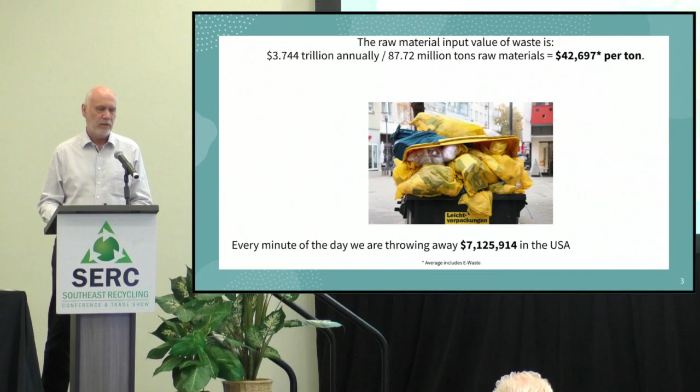What we're doing right now, you've seen this a number of times today, we have the linear economy. You take it out of the ground, you get raw materials, you refine it, you manufacture something out of it, you use it, and throw it away, very often landing in a landfill.

There have been some very interesting ways shown today of what you can do otherwise with some waste, like clothing recycling. That is very important to do, but a lot still lands in a landfill. We're throwing the resource waste away. End of the economic chain, a lot of value gone.

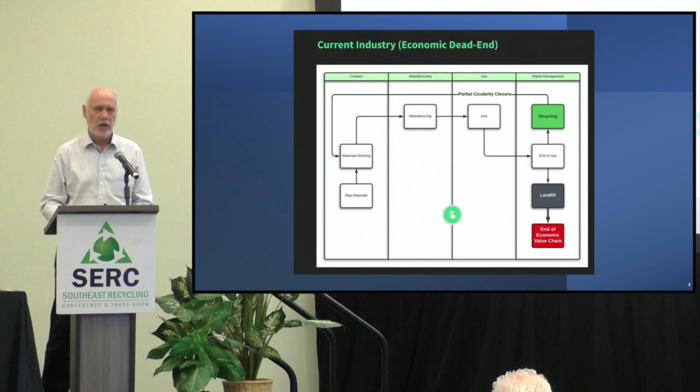What we'd like to do is break this end chain and bring it, after the end of use, into the Carbotura Regenesis process, where we're closing the circularity loop and bringing it back as raw materials into manufacturing. So it is recycling to 100%.

So your municipalities and cities can now say, we're not making the 25 or 30% that we normally hear, or 40% in some other places, which is marginal, but we can get it to 100% recycling.

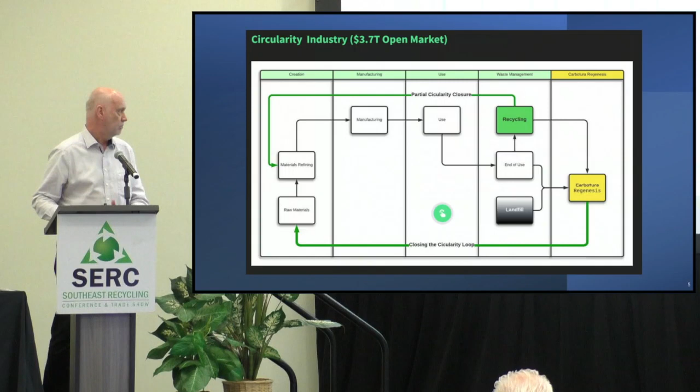What we do, we have the Carbotura ZeroFill service. We've introduced it into the global waste industry. It is a proven and patented technology, about 40+ patents that we have access to, and it closes this broken loop and brings 100% circularity into the circular supply chain.

It is not waste management, I'm not talking about the company WM, it's not a waste management or recycling industry. We are really from the manufacturing of materials industry. It's a different view of this. We are in the circularity industry. We supercharge waste management with circularity. It's a little bit different. We'll go into that shortly.

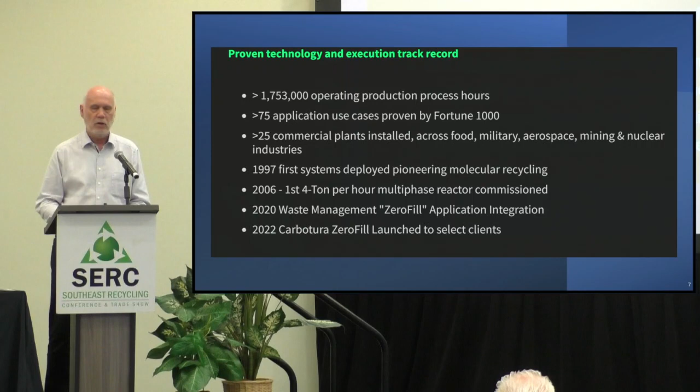With this technology that we use in the Carbotura process, we have 1.753 million production operating hours, many different applications in Fortune 1000 companies, 25 commercial plants installed across the food, military, aerospace, mining, and nuclear industries, proving this technology. And the Carbotura ZeroFill service is launched to selected clients starting in 2022.

We are doing front-end engineering for a 2,000 ton per day MSW, Municipal Solid Waste, facility in Chennai, India, one of five. So in Chennai, India, they're scaling up to 10,000 tons of processing waste per day, 7 days a week, 24 hours a day, 365, no stop. This can work. That's a hell of a lot of waste.

Under development, we have a 500 ton per day MSW, MLW, municipal liquid waste, demo facility. It will be in Colorado, where we are also setting up a production facility on contract manufacturing to produce these units. And also another facility in Connecticut for MSW, MLW, tires, ash, and other things. We can take that in there.

And there are 50 projects totaling 142,000 tons per day of capacity in various stages of service and development. Some are in Saskatchewan, Canada, Jefferson County, Alabama, Miami-Dade, Florida, around 6,000 tons a day. And that should be coming.

In Miami-Dade, we will even be able to process the sargassum, the seaweed that's coming across the Atlantic and inundating the beaches that our people want to go swimming at. The sargassum is quite smelly, quite toxic actually, when it gets on the beaches. And they're not allowed to bring it into the back swamp somewhere and just dump it. Rather, they have to process it in a certain way. And there's no good way to do it other than with the Carbotura process.

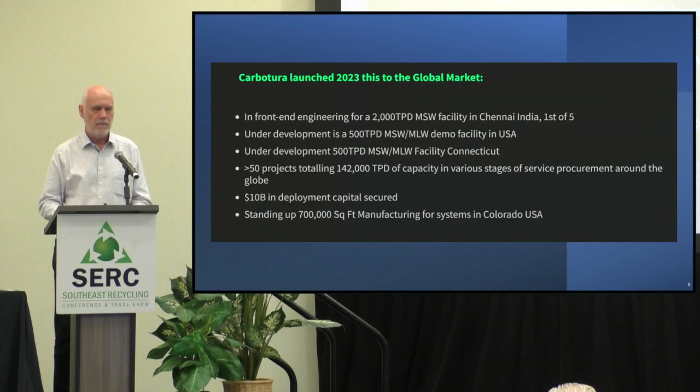100%. So what does it cost? Zero. We also set up a circularity fund for the community from our own profits that we will bring back to the community, to the citizens of such a community, to help them with an environmental fund, an environmental group there that wants to do something for their community. So it's not only carbon negative, this whole process, but it brings back money to the community, costing it zero. That zero is less than a $10 landfill fee, at least with my math.

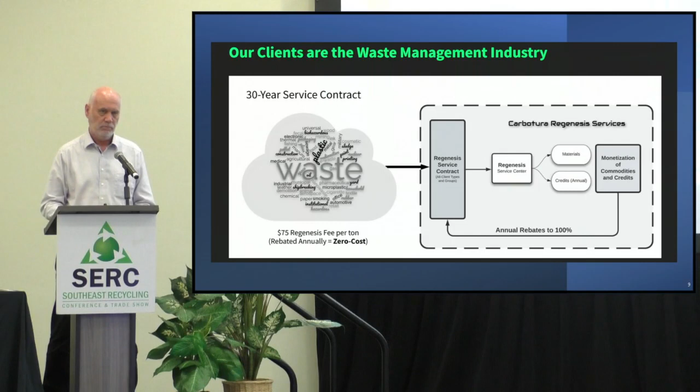We create materials out of it, which we can bring back into the circular economy and create new materials, hence regenesis. Sounds a little bit spooky, those words, but it's regenerating or allowing you to make new materials out of the waste that has come there without having to sort. There's no pre-sorting done at all. We want a 30-year partnership to modernize the waste infrastructure that you have.

What could that mean? Right now you will have at home how many different bins? You'll have the waste bin, the recycling bin, a paper bin, an organics bin, something else. Maybe someone else can chime in and tell me what you have, but you have all those. We can take it all in one bin at home. That means good things for each citizen, each household. One bin, maybe 2 bins for your waste, all your waste, organics, all your old recycling.

Now you don't have to take your yogurt thing, wash it out at home, and put it in there because you don't want the MRF to take that yogurt anymore. Okay? You don't need to do that. Put it all into one bin, we can take it away. It also reduces the amount of trucks on the road.

Now, one of SWANA's goals is to get the waste industry off the 10 most dangerous jobs in the US, where it is right now. I think it's number 7. Correct me if I'm wrong. 5? That's gone up to 5 again. That's not good. That's not good. We've got to get it off. So if you reduce the number of trucks out on the road, then you have a safer workplace.

Fewer people getting hit. I just saw the other day a video the former head of SWANA, David Biederman, was sending out, I think on Facebook or something like that. It showed, on the back of a truck, the little video camera looking down where the guys are dumping the cans and the bins into the truck. And he looks back and he sees a car barreling toward him. He jumps out of the way and the car goes right into the back underneath the truck, all the way up to the front window.

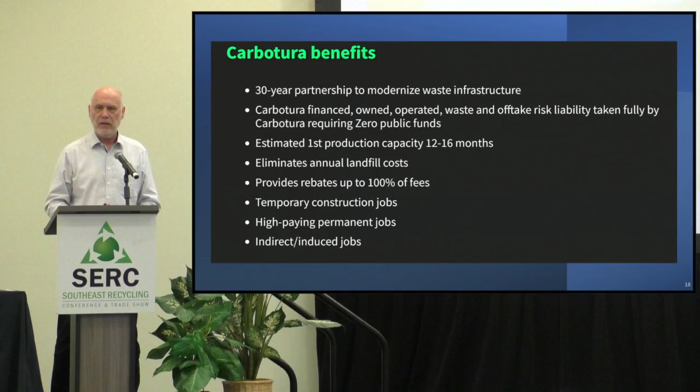But consider the extension of your landfill life. Instead of only 10 years left, now maybe you have 30 or 40 or 50 years left on that landfill, because you're putting such a small amount in weight and volume on it now. Cleaner air and water, reduced pollution, no odors, no stink. This is all under negative pressure in the buildings. There are no emissions coming off the Carbotura process.

We reuse and remediate existing locations. As I said before, we can mine a landfill and process this material as it is. Improve public health and environment: no emissions, nothing going into the ground, nothing going into the water system. We can take all of that and sell all the product coming off. It's 100% diversion from landfill and 100% recycling. That might bother some of the MRFs out there, because they don't get this material anymore. Okay? Maybe we can take over these people and have them work in such a Carbotura facility as well.

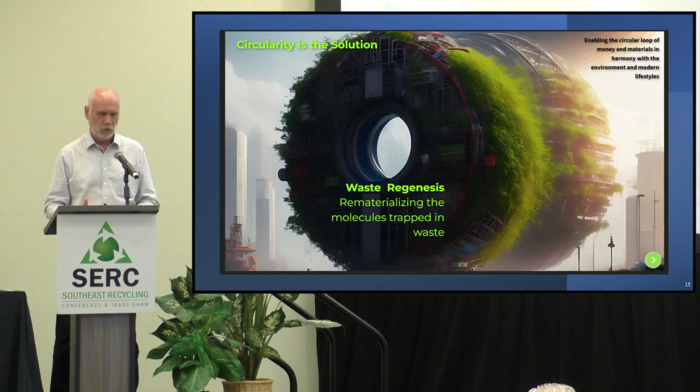You get the 100% diversion, recycle 100% of all the waste. You do it with zero capital, our investment. You can have it with zero emissions, and you can achieve zero cost with it. And there's no single-use waste materials. Now, you've been told before straws or these bottles may be just single use and you throw them away. Well, there is a reuse for these.

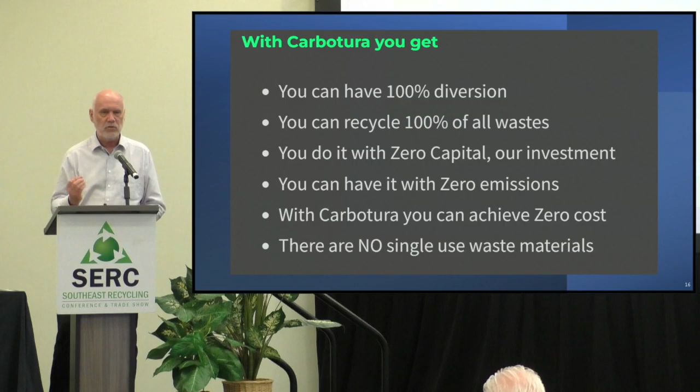You can break those down and you get the molecules out and reuse those molecules to make new plastics, new virgin plastics out of it. You're not just stuck with a PE molecule there and a PP and whatever they are out there and finding those and sorting those. You get the individual atoms out there.

We take any waste stream, unsorted MSW. We don't care about contamination in it, like in the contaminated recycling. It doesn't matter. We have the yogurt thing, as I said, if it's in there, or you heard before today about the Smucker's jar in the glass. It doesn't matter if that's in there. We can take it. Has all the things we need.

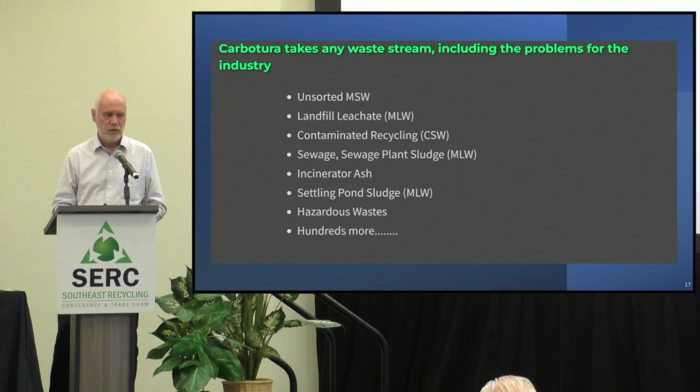Sewage plant sludge, municipal liquid waste, incinerator ash. We'd want to mix that with the waste, because ash itself doesn't create the fuels that we need to run this plant. This plant runs on the fuels that we make. We don't pull the energy that's needed from the grid. So it's energy self-dependent. Take settling pond sludge, hazardous waste, and really hundreds more.

This is what a typical 100 ton per day MSW module system would look like. Look in point number 1. This is the multi-phase microwave reactors to disintegrate materials into their various vapors and base solids, as well as liquids. 2, this is where the microwaves are produced from the microwave generators to work on the microwave reactors or converters.

This is where the materials are condensed and then brought out so they can be trucked away. Because remember, there's a mass balance. What comes in goes out. You can't lose mass. You can't defy that law of physics. 1,000 tons goes in, 1,000 tons will come out. We take that away in form of graphite, graphene, and other products that we make out of it. And we monetize these.

And 4, these are the tanks for the gaseous and liquid fuels collected for the energy generation and to sell. Yes, we can make the liquid fuels and turn them into SAF, very interesting, but it's a thing of economics. For example, I think in Florida, you can take 1 ton of MSW and produce about $11 worth of electricity. It's not even worth trucking it around for that. With 1 ton of MSW, you can produce about $80 worth of SAF. Economics look a little bit better on that.

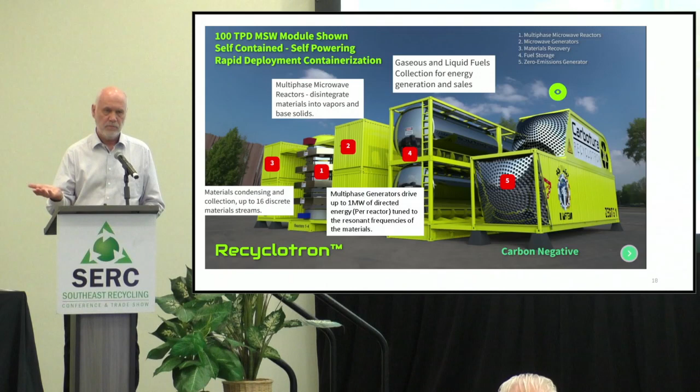From 1 ton of MSW, you can get around $1,000 to $1,500 worth of graphite. Hey, that's something we can monetize and make it work for us. And that's why we can offer to supply all this equipment, hundreds of millions of dollars worth of equipment, because we can monetize and pay for it.

And in 5, zero emissions gas generator, gas turbine. A turbine does have emissions, but it doesn't go up a stack. It comes out and we break it down with a plasma arc, such that the oxygen gets used back in, and the carbons and the rest come out and go with the char at the bottom. So no emissions into the atmosphere.

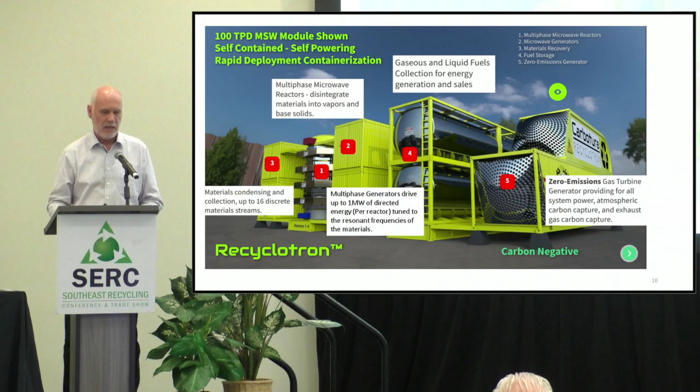There's a very simple diagram. We won't go into all the details here because time is getting a little bit short, but I think we're doing well, but I'm not going to drive you till 5, don't worry.

1 ton of MSW coming in, and everything, as I said, coming out with the glass, metal, water, graphite, graphene, industrial gases coming out, is still 1 ton. We also take in the oxygen from the outside and use it in the gas turbines. And we produce all the energy we need for the whole process.

Graphite we need, for example, in the anode section of EV batteries. Every Tesla EV battery has around 200 pounds of graphite that's being used in it. And this graphite now comes from China. Nothing against China, but currently the geopolitical problems or challenges that we are all facing right now with this country, because they're also throttling the production or the mining of their graphite, are causing a serious squeeze on the graphite supply in the world.

We can make it out of our own waste and at no cost from here. And it's beautiful graphite for different uses. I'll show you that in a minute. Even graphene. Now, there's an old saying, what is a girl's best friend? Diamonds. From graphene, you can make diamonds.

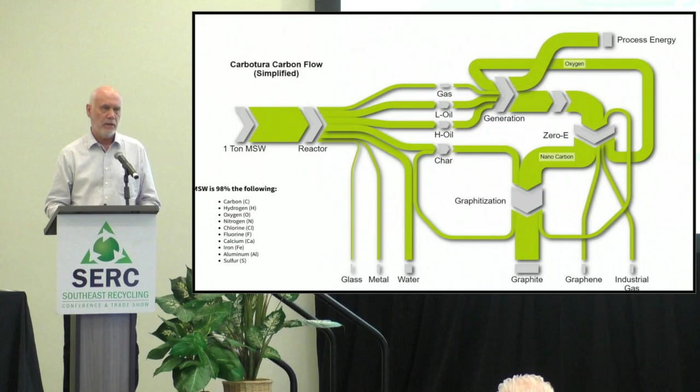We've certified that 1 ton of MSW produces 620 pounds of graphite, so around 32% is graphite in MSW. Depends on the mix too. You might get more if you just have tires, and we can take tires, shred those tires, and manufacture with the tires 24/7, 365, just with tires alone.

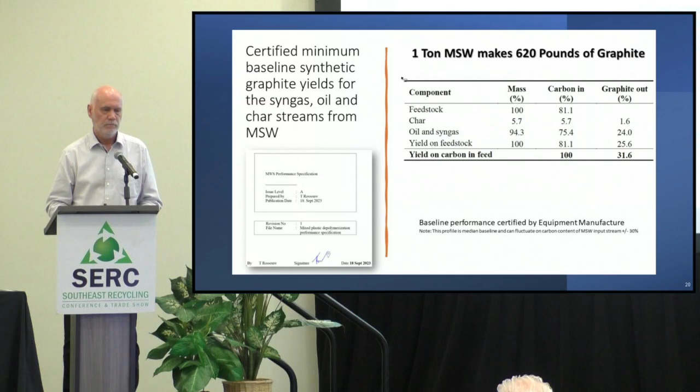Aerospace structures, auto racing components on the Strong, and Med, even for implants, prosthetics, medical devices, all from your waste. All clean enough and put together enough, these different graphites can be used in these applications.

All of you are facing the PFAS, PFOS, and whatever these chemicals, thousands of different chemicals, let's just call them PFAS right now. These problems are in your liquid waste, in your municipal solid waste, it's in the air, it's in your biosolids. In Maine, for example, they're not allowed to land apply biosolids anymore since the middle of 2022, I believe. And that's a problem because of the PFAS and microplastics in there.

This process, the Carbotura process, completely eliminates the PFAS molecule. It completely cuts the bond such that you have carbons, fluorines, oxygen, and hydrogen out of it. The temperatures are more than 1200 degrees C in the microwaves, and over the plasma arc they're getting around 3000, at which your PFAS molecule is destroyed. That's certified. So you can take this material and completely eliminate the PFAS challenge that we're all facing now. Nothing else, as far as I know, can completely get rid of it.

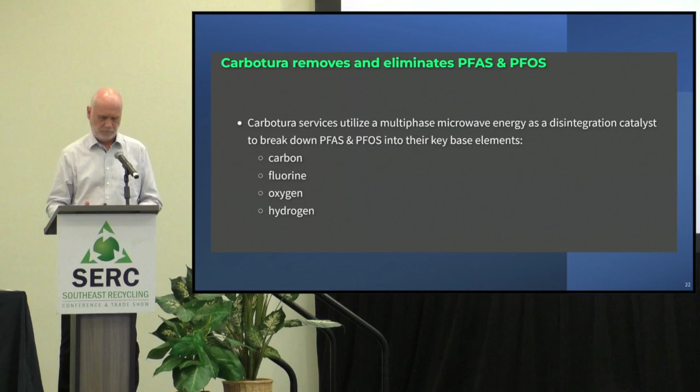And we put all the microwave chambers in a vertical way in here, so the waste that comes in is shredded, baled, and wrapped and coated. You'll see a picture of it in a second. And we want those bales, and we put them in there that way. Why do we do bales instead of just loose stuff and throw it in?

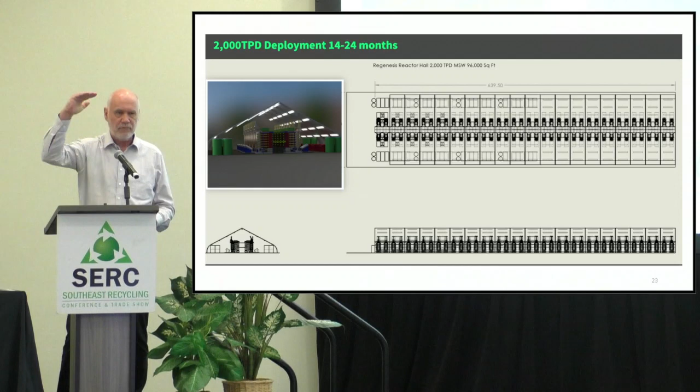We want it clean. We want these bales to come to us, or when the waste comes to us directly, we bale it, we can store these bales and use the storage as a buffer and take them in and use them in all the microwave chambers here as they're needed. So it's continuous use in those, and the buffer will go up and down in the storage.

We want to do that such that this can be done at the transfer station and then transport this flatbed container to the Carbotura facility. It's not leaking out, there's no water coming out, there's no air getting in, nothing happens to it in the transport when it's being stored there, and put it in our storage to be then used in the Carbotura facility.

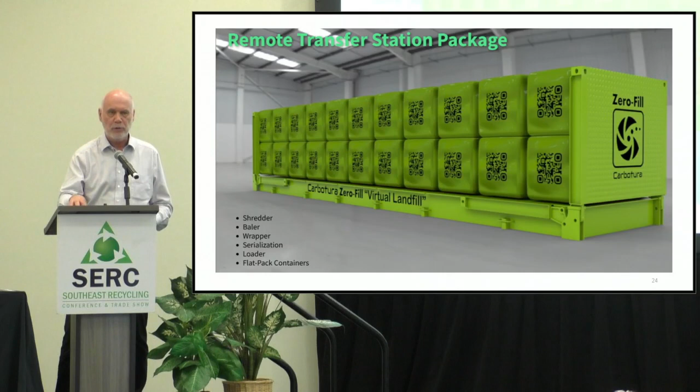The coding is used because we want to know where this material comes from. So transfer station A and B, one has 1,000 tons a day, one has 2,000 tons a day. We want to know where that material comes from so that we can give the credits back to that community where this material came from in the appropriate amount and appropriate percentages.

What are we doing? We can make a blanket contract payment guarantee to the county, province, state, or region with a master agreement such that it can be utilized by any sub-government. So let's say we talk to the state of Florida, just as an example. We can say, okay, we'll do a blanket agreement for the whole state, and you can have your counties or different municipalities come online under this contract and increase it. We won't have one facility, let's say in Tallahassee, but there'll be different facilities around the state where it makes sense, so you're not transporting waste all over the place.

Name the municipalities that'll work in this service contract and they'll receive the rebates. And the communities can in turn name the hauler and the waste management companies to fall under the service contract. So we can still work with your current haulers that you might have now. If you do it yourself, we can work directly with the municipality or with the haulers, keep them in that contract.

One deployment we're looking at is in a Middle East country, in Saudi Arabia. We're going to invest $1.5 billion. Around a 5,000 ton a day initial capacity. We'll have 2,000 tons of daily fresh waste coming in, and 3,000 tons a day for the stored waste that they have. They have a very large set of landfills there. We need 50 to 100 acres of land. In Saudi Arabia, that's not too difficult. In New York, Rhode Island, Massachusetts, that might be a little more difficult, but for around 2,000 tons a day, we need around 15 acres of land.

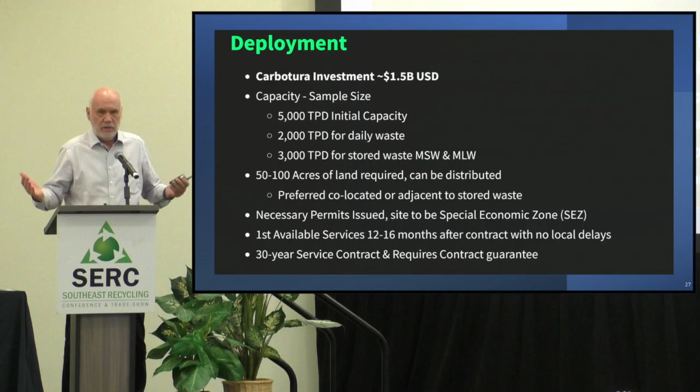When you're ready to talk, we can gladly set that up right now. Mutual non-disclosure agreement, memorandum of understanding or a contract, how we want to work further together, and matching your integration. Not one size fits all. We want to know what kind of waste it is. We need a waste analysis. We'll work with you on that, siting and the whole thing. We'll do different contracts as needed, deployment plan and timeline, and the execution of the contracts.